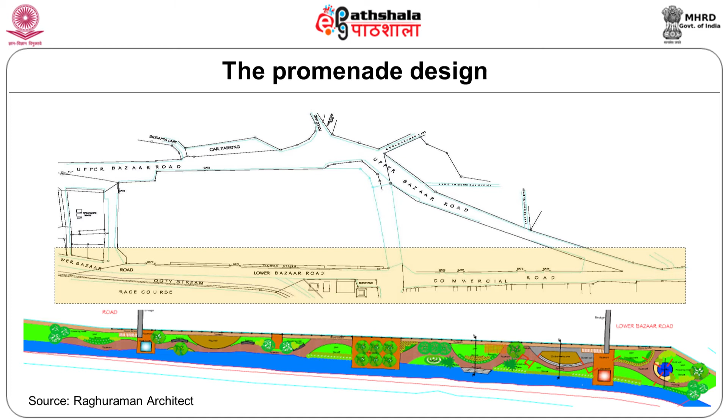So the promenade design, you have a glass house, you have sitting areas, stone bollards, shrubs, flowering, and you can also have a fireplace.

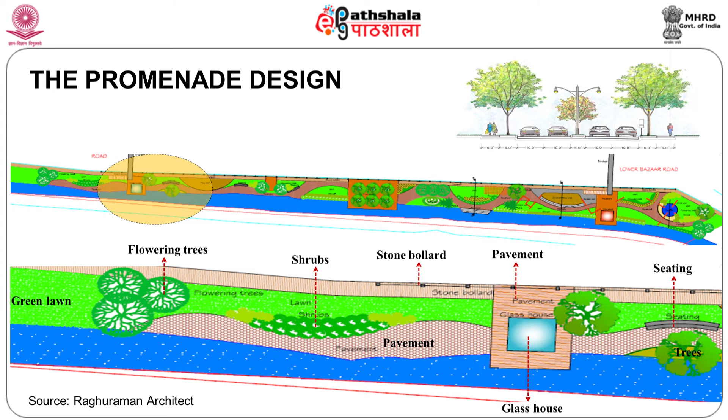So this is how it looks. You can see the riverlet, padithurai, glass house, and then the bridge crossing from this side to that side. With all the amenities, this will really make the area very attractive, number one. Number two, it is usable. Number three is provision of all the facilities for the people. I mean, we have to think of really something different.

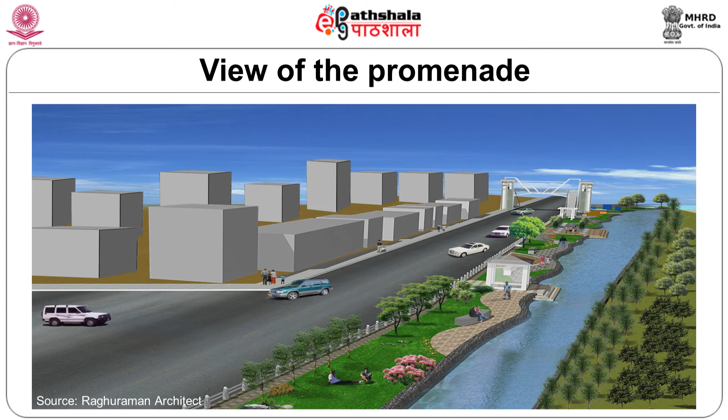Then we are talking about the bus stand. The bus stand now occupies only around 30 buses right now. In the same space we'll be able to accommodate around 70 buses.

And a car park is designed next to the bus stand. 488 cars can be provided. And in the bus stand, you can have amenities like dormitory, ATM, restaurant. All the other facilities which are part of the bus stand can be provided.

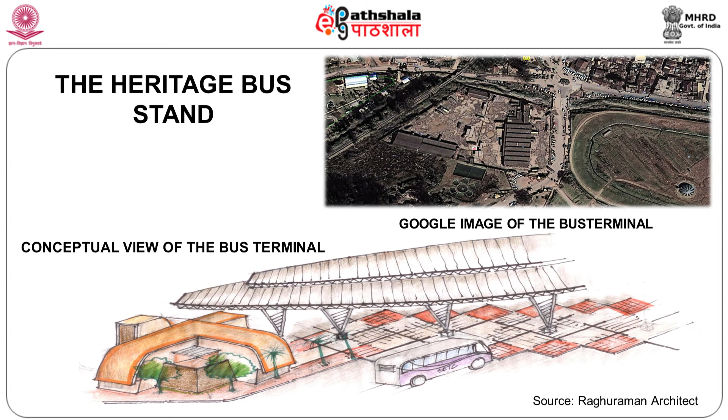So you can see how the bus stand evolved over a period of time, how the design elements took over, how it will happen. So this is a plan of the bus terminal with parking below. Again, you have enough space for buses to get parked, enough space for the garage, enough space for repair.

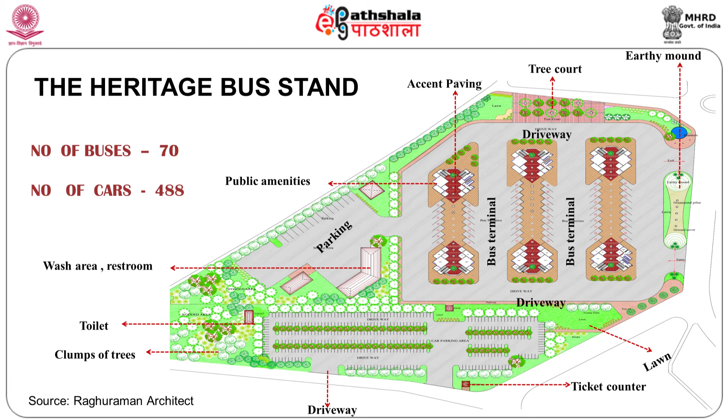And you have two levels of accommodation, restaurants and toilet blocks, everything provided. So all the amenities are in one place, plus the usual features of the bus stand. Have enough shops. These are all planning.

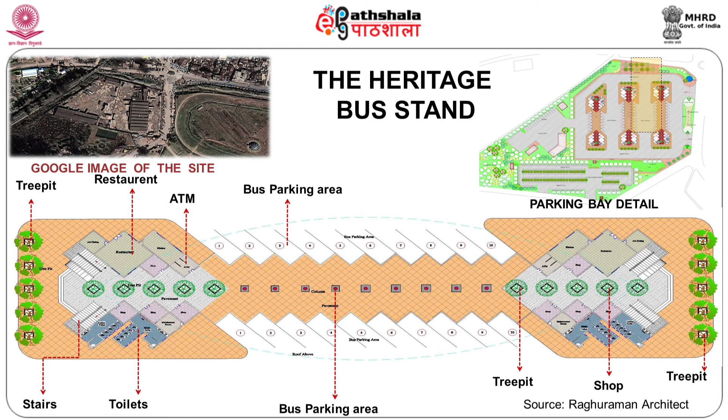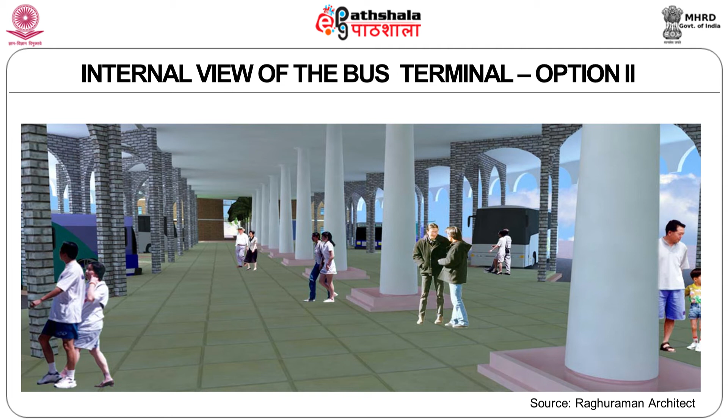And we are coming to the market area. Presently, the market area comprises roughly around 5 acres of land. Now we have around 1300 shops there. So how are you going to accommodate all of them? And then you need to have open and closed shopping areas available in this zone. Now the present shops are open. It's all open to rain and shine, everything.

So in the proposed area, you have different levels available. As you all know, Ooty is a hilly terrain. You have different levels available for you. So at level 1, you have the parking and road. Your promenade starts after 50% of the road area. Then you have enough open spaces in the design of the market.

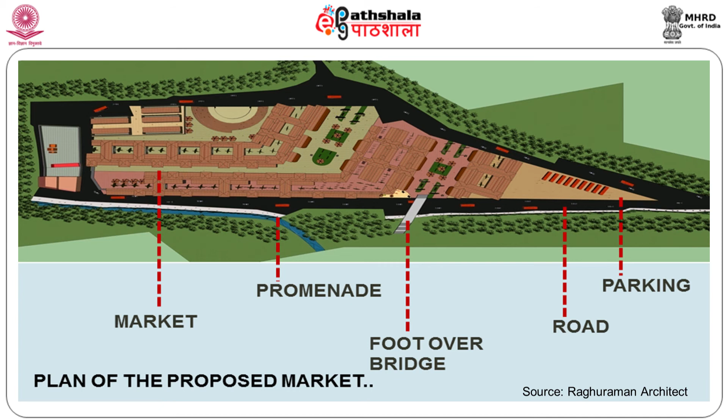Then you have your amphitheaters, your exhibition spaces, different levels of markets available. So these are some of the views outside the market area where you have the promenade walking and the kind of stone used for the market. A local architectural style; you should always remember we are doing this for the Ooty township.

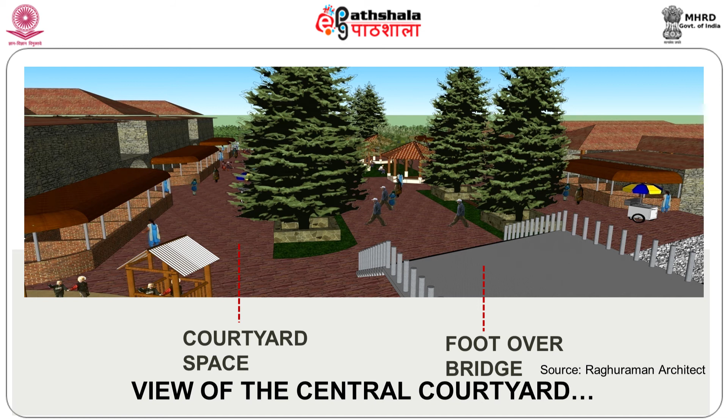So ultimately, you have plenty of rain, so you need to have a slope roof so that water will not go into the shops. And these temporary shops are provided so that people can really use them on a daily market basis or a weekly market basis, depending upon the usage pattern.

Then it's basically an urban designer who is very important in this kind of planning, where it's an activity-based planning. So what is the activity in this zone, what are the requirements in this zone, then based on the requirement how you are providing the facilities, and then how the facilities will contribute to the urban design of this area.

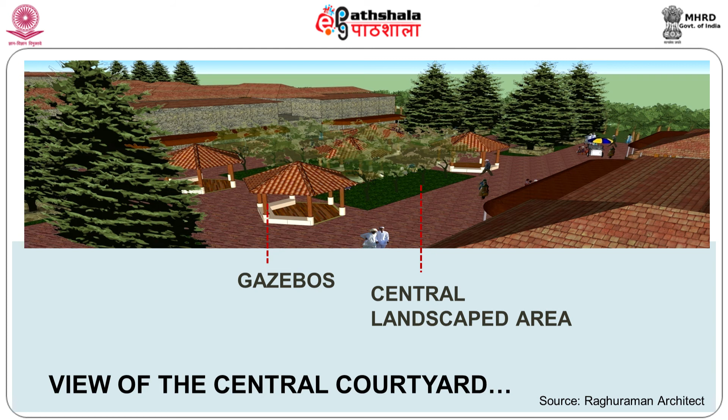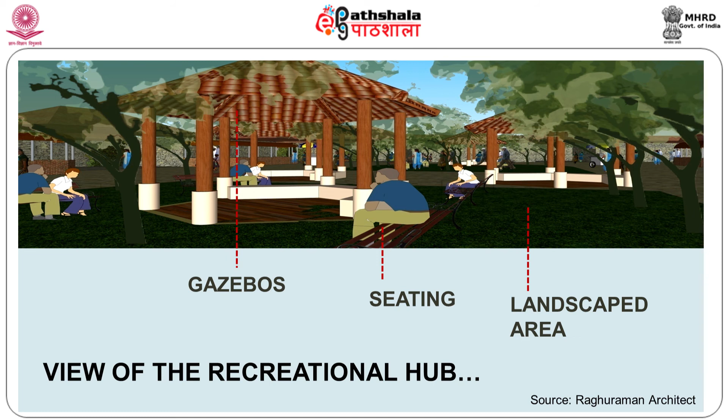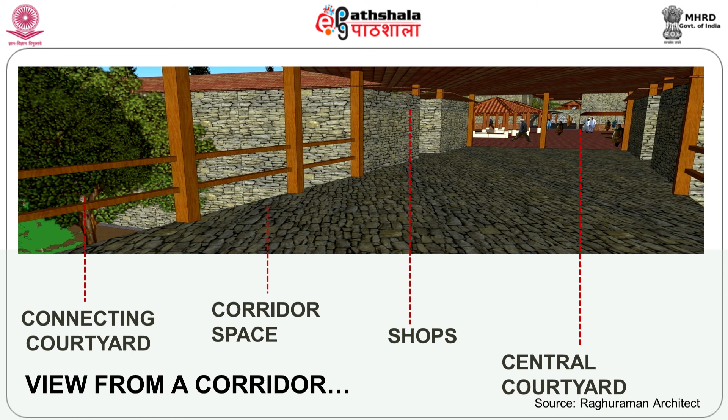You can see some more views of the rain shelters or gazebos. We also think in terms of a large landscaped court with pine trees around, for people to sit, benches and rain shelters. Connecting corridors of a different level, different materials are used. Again, connecting corridors with a tree growing in between the corridors.

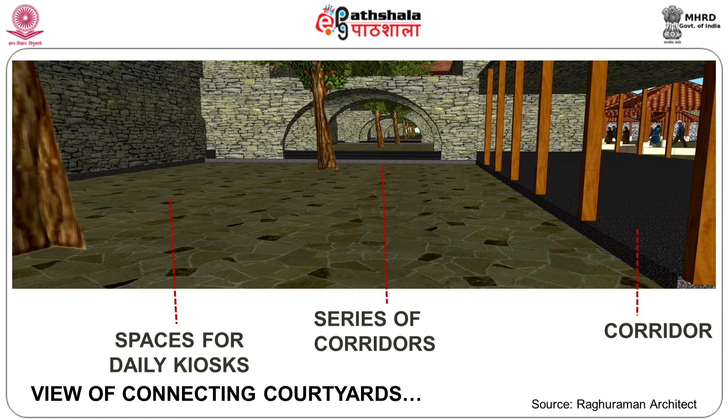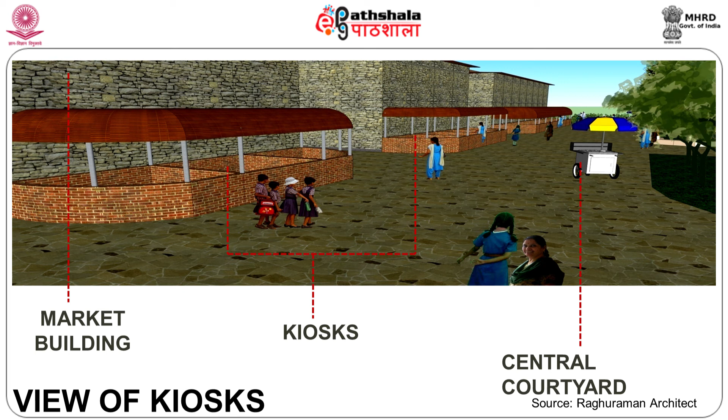Shopping areas, kiosks, central courtyard area. You can see the service core is located in such a way that all the service activity will take place in between the buildings. So in front of the building all the shop selling will happen, and behind the building all the waste and other services will take place. So this is how the levels have been taken up in this particular campus.

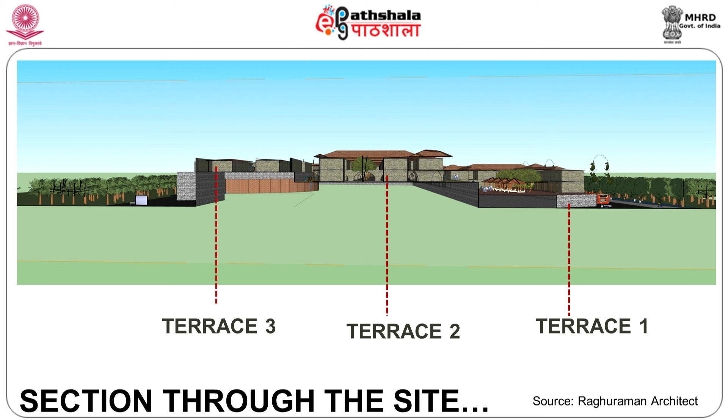You can see we have also introduced some play area for the kids, so that when the kids play, elders can go and do the shopping properly. Again, a view of an amphitheater, wherein cultural activity can take place. Marketing people can use this as a major advertisement campaign area.

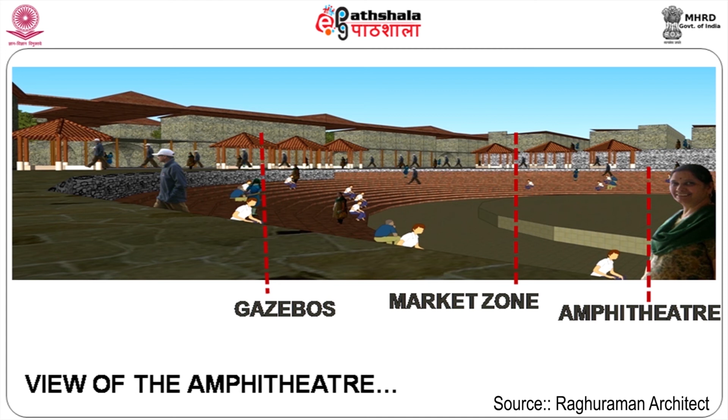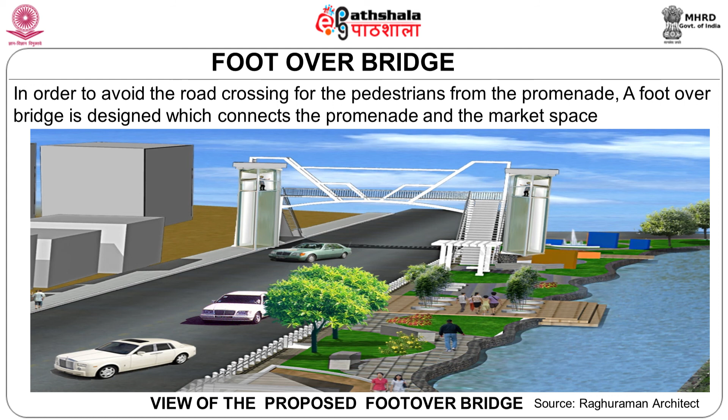Okay, then we're talking about the promenade. Earlier we talked about a promenade, and now you can see the close-up of the promenade, how it connects to the shopping area. Basically, we are looking at relocation of the car parking area. There is no defined parking near the promenade. The fisheries land is huge. With the land provided we have easily been able to accommodate around 400 cars, 15 buses, and 300 two-wheelers, with the drivers' accommodation. Everything is taken care of, so that the entire chunk of parking has been shifted from the promenade area to this area, so that people have space to walk.

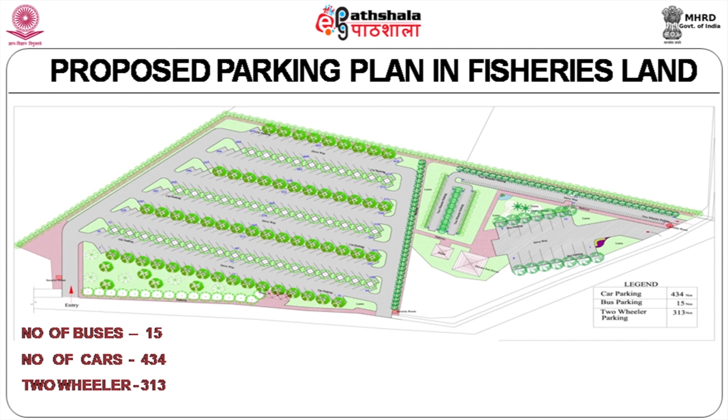We are totally forgetting something called the activities of the people. We have been just making them get down at the appropriate place and then get up again in the same place. We should know how to walk. That is the basic idea of this particular planning. So your parking requirements have been taken care of. View of the bus parking, car parking area, two-wheeler parking.

Actually, I was thinking very drastically in this particular project about how to improve the quality of water in the lake. Now, what I am going to talk about here is a totally out-of-track solution. But these kinds of out-of-track solutions will ultimately give rise to a better environment. There is a small check dam on the other side of the Ooty lake where the water overflows into the marshy area downstream. They are also planning desilting of Ooty lake, so that the depth of water is increased.

So in this context, my different concept is, in the month of December or January, you remove the shutters of the dam on the Ooty lake, allow the entire water to escape through the marshy area, so that your lake will become totally empty. And you can do all your desilting activity in 3 months' time on a war footing basis. Of course, tourists may not be visiting in that period, when it is school exam time for the kids, and people will have a lot of work to do rather than coming and enjoying the hill station. So in these 3 months you can really clean up the whole thing, plug the opening in April, and then wait for the monsoon to come and fill it up. It will happen in 15-20 days' time.